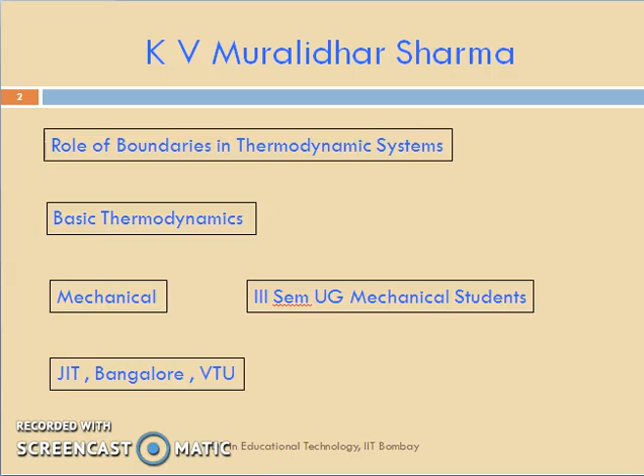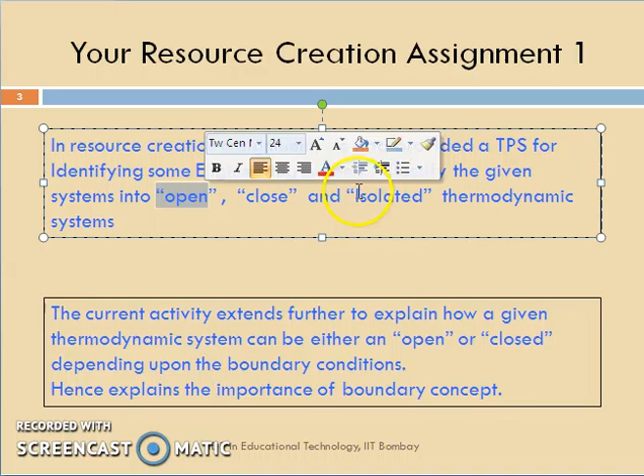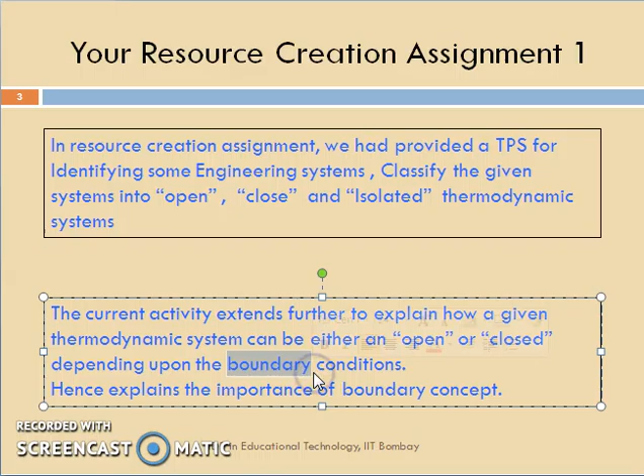In the previous session, we discussed what is an engineering system and how it's classified under open, closed, and isolated systems. In continuation of that, let's understand the importance of the thermodynamic system boundary in this present class. The key concept we are dealing with is the importance of the boundary in defining the system type.

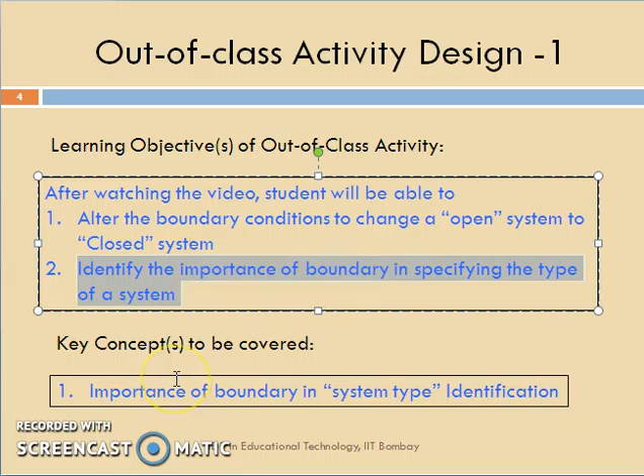At the end of the session, the student has two takeaways. One, how a system boundary can be altered to transform an open system into a closed system, and the second takeaway is identifying the importance of the boundary in specifying the system as open or closed.

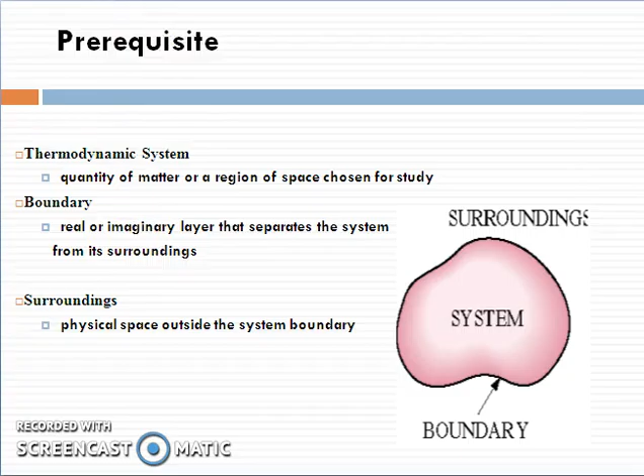In the previous session, we didn't talk much about the system, the boundary and the surroundings, which are supposed to be the prerequisite. We adopted a three-stage approach: stage one, identifying the different interactions, namely mass and energy including both work and heat; stage two, identifying the correlation between the interactions on one side and the type of the system on the other side; and third, based on this correlation, identifying the system as either an open, closed, or isolated system.

Now the question is, if we look into a simple system, is a four-stroke engine an open system or a closed system? Let's think for a minute. In fact, this was a question in one of my previous classes. I have been asking this question to the students before talking about the concept of boundary.

In a class strength of 56, 30 students answered it was an open system. I repeat the question: is a four-stroke engine an open system or a closed system? 30 students answered open system, and the rest answered closed system. The question remains, can a system be both open as well as closed, or who is correct? Are the 30 students who answered open system correct, or is it actually a closed system?

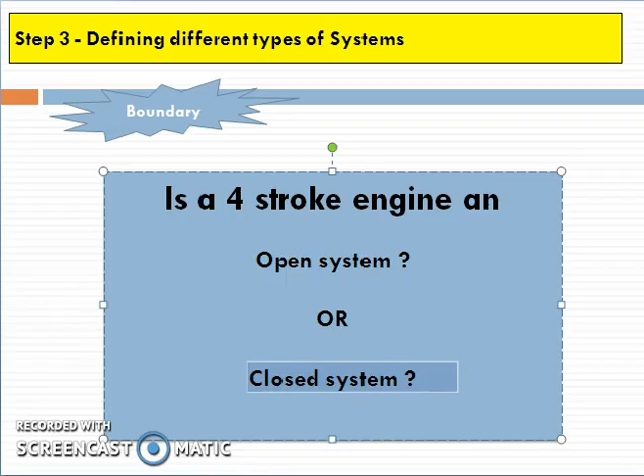You can think about your answers. If you think the majority is correct, that shouldn't be, so you need not align yourself with the numbers, because there is almost an equal number, 30 and 26. The answer is a four-stroke engine can either be an open system or a closed system. All the students are correct. How can it be? How can a system be both open or closed? That's where the concept of boundary comes into the picture.

If we recollect our elemental study of the four-stroke diesel or petrol engine, there are two openings called valves, one representing the suction, one representing the exhaust. When one of the valves is open, there is a mass flow in or mass flow out, depending upon whether it is the suction valve or the exhaust valve. So in two of the four strokes, other than the suction and exhaust strokes, there is no mass interaction, only energy interaction. There is heat transfer and work transfer happening.

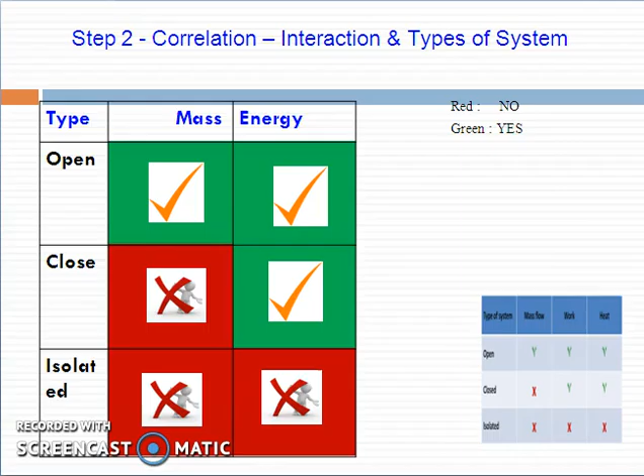So hope we have answered the question. The reason being simple and quite indicative. It is the boundary condition that decides, where we are deciding the boundary. If we consider the boundary excluding this mass interaction, then the same system becomes a closed system. And if we extend the boundary to the cross section of the flow of the mass, then the same system becomes an open system.

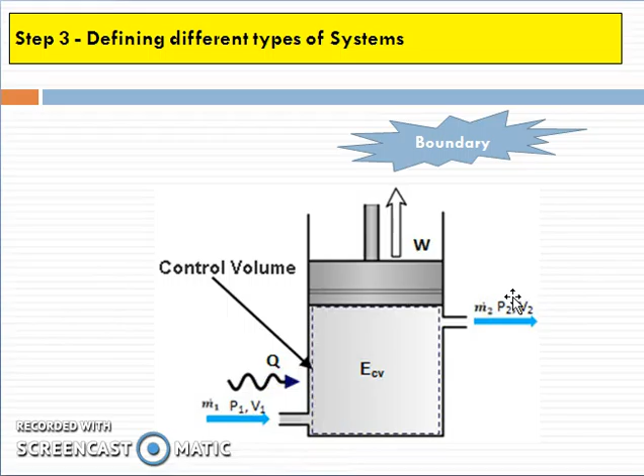A small reflection quiz on what we have learned. A frying pan on a gas stove is a dash system. There are four options: A, B, C and D. Option A, an open system. Option B, a closed system. Option C, either an open system or a closed system depending upon the boundary condition. And D, none of the above. Which is the right answer?

That's correct. Option C is the right answer. A frying pan can either be an open system or a closed system depending upon the boundary condition. To make it simple, if the lid is closed, it becomes a closed system. If the lid is open, it becomes an open system.

You can please submit these two assignments before coming to the next class. Question number 1, you can illustrate any two examples. Kindly exclude the two already illustrated in the mentioned video. Illustrate with an example how an open system can be transformed into a closed system, and in both the cases indicate the boundaries. The second assignment: is a 4-stroke IC engine an open system or a closed system? How do the boundary conditions differ during the different strokes, namely suction stroke, compression stroke, expansion?

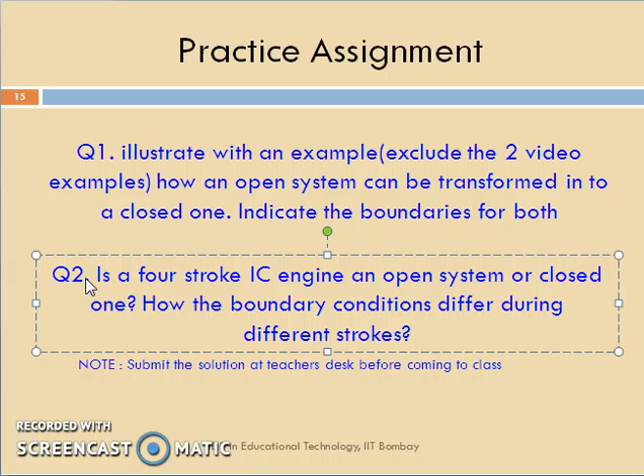You need to make an Excel sheet. You need to submit the answer in a tabular form, mentioning on one side the different types of strokes, and on the other side the boundary conditions and the type of the system, and substantiating your answer during each stroke. So that brings an end to this session.

To quickly recapitulate, we can take a system. A system can either be open, closed, or isolated depending upon the boundary conditions. If the boundaries are considered such that at least at one part it is open for the mass flow, this becomes an open system. If it is fluid tight or mass tight, it becomes a closed system. And if it is further insulated with no energy transaction as well, it results in an isolated system. That means the same system can be open, closed or isolated depending upon the boundary conditions.

Here are other two examples. If the mass flow is arrested, an open system is transformed into a closed system. And if the energy transfer, to put it simply the heat transfer, is also arrested, the same system is transformed into an isolated system.